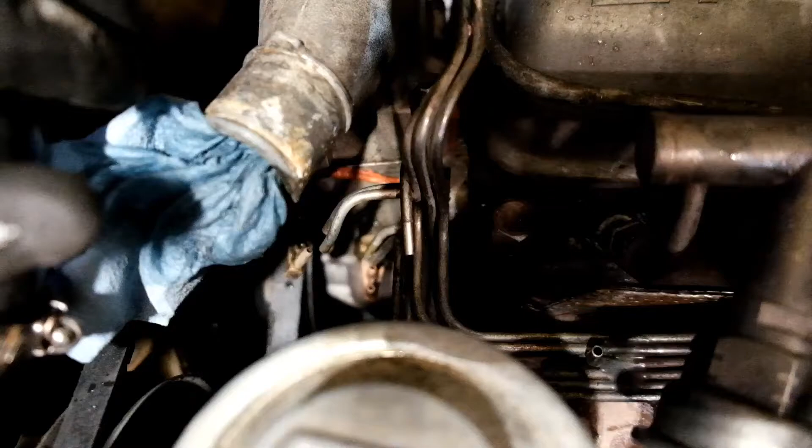Alright guys, so I want to show you guys what I've done so far.

Basically, I just installed that vacuum line bracket.

I did this a little bit backwards. So I put this air injector rail in first last night, but then I realized my initial plan was not to use this vacuum line rail, because I think it was pretty much all hooked up anyways.

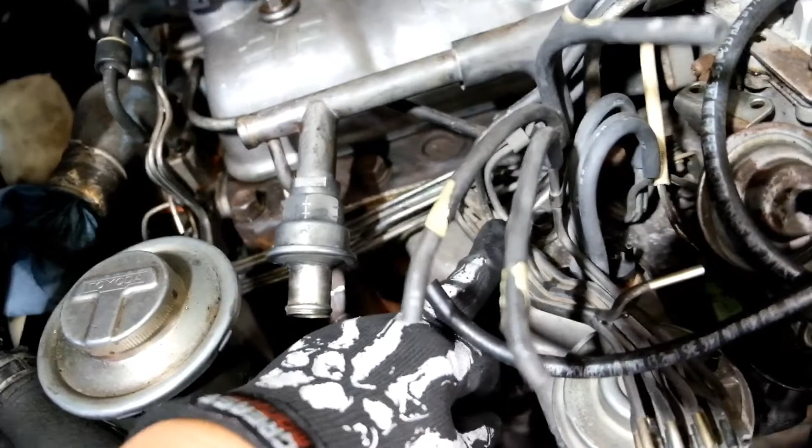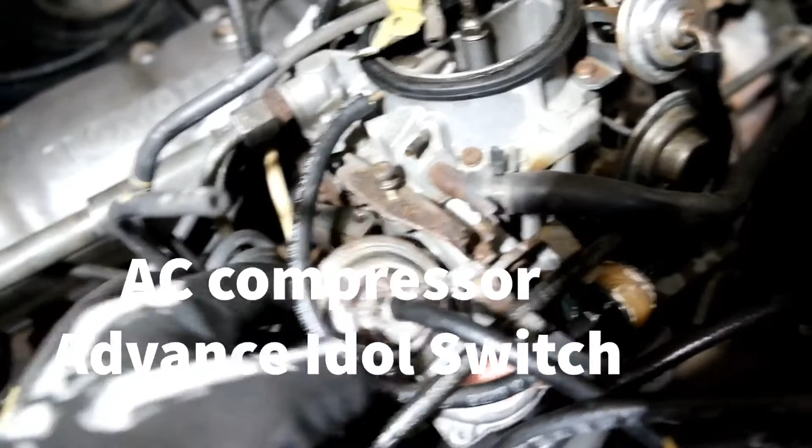But then I changed my mind today. So getting it fed through here was not an issue. I just had to remove this little thing, I don't know what it is, off the carburetor. Once I moved this out of the way, I was able to feed this vacuum line rigid line under this pipe right here and fed it through here.

Now the bolt you'll need to take off is off the water pump - I'm sorry, not the water pump, the thermostat. That's where this mounts to right here. You'll lose a little bit of fluid, so not a big deal. And then there's one more screw right here where my finger is. Let me get a little bit of light here. So there's the other screw.

So right now everything looks really good. One nice thing about this particular rail is that it already has all the vacuum lines, for the most part, already there. So now it just becomes plug and play kind of an idea.

So I will go ahead and turn the camera off and do a little more work here, and then I'll come back and update you on the progress.

Okay guys, so I just want to give you an update. So I've got this whole section from the driver's side over all wired up with the vacuum hose, and everything looks really good. It was actually a lot easier than I expected going into this specific process.

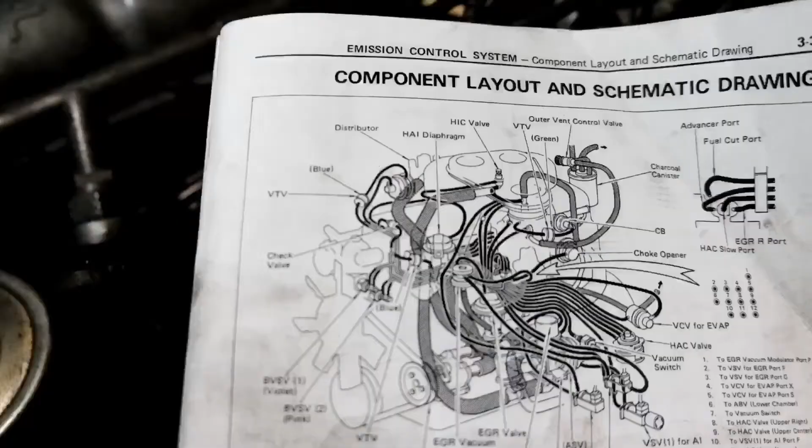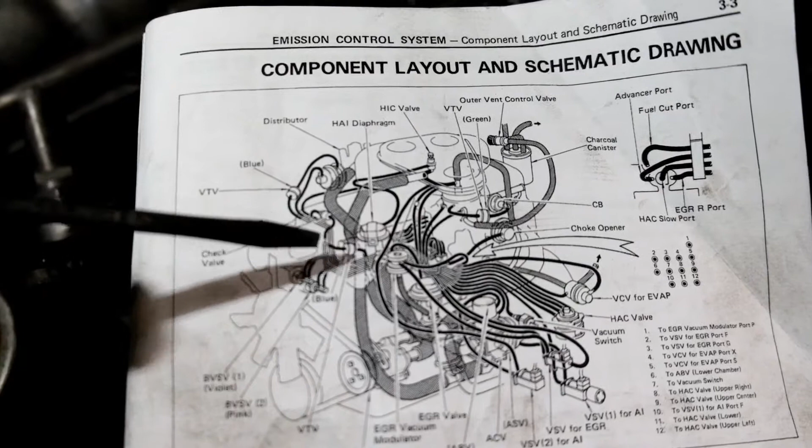Okay, so let me just share with you guys how detailed this book is for you to do this project. For example, I was working on this - let me grab a screwdriver. So see this little filter right here? It's hard to see on the camera, but you gotta trust me. So what this filter is, it says here...

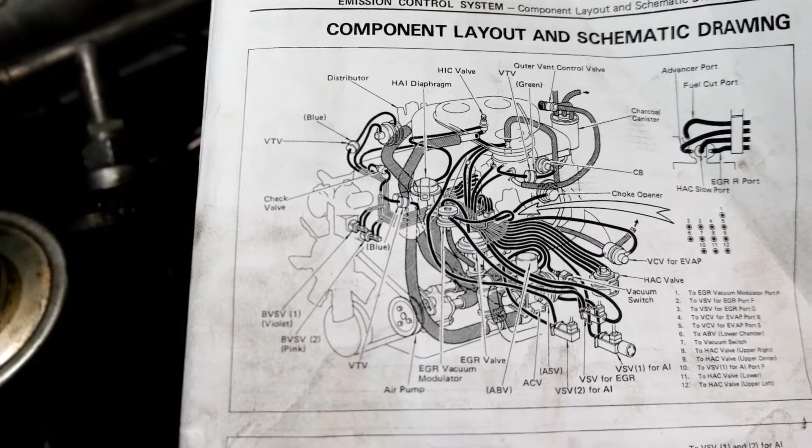VTV with the arrow, and then blue. The word blue is right here with the arrow. So I didn't really know what that meant, and I was looking at this particular tube coming into each other. Let me just show you what that means.

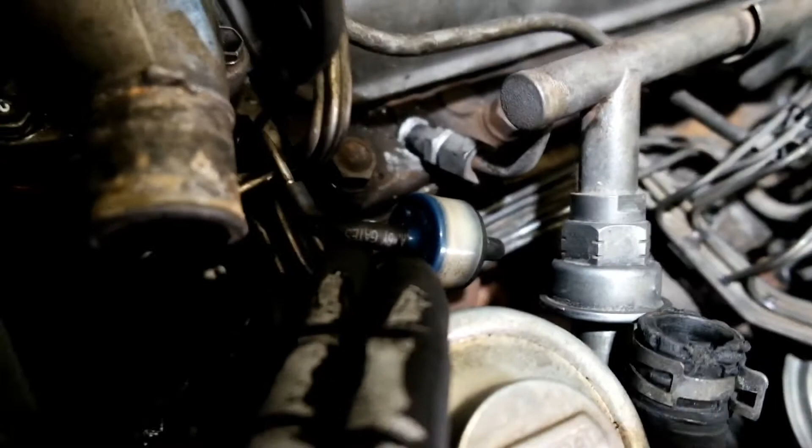So if we go over here, this is the filter right here, and one side is blue, okay, and the other side is black. So basically this tells you exactly which way to point that filter.

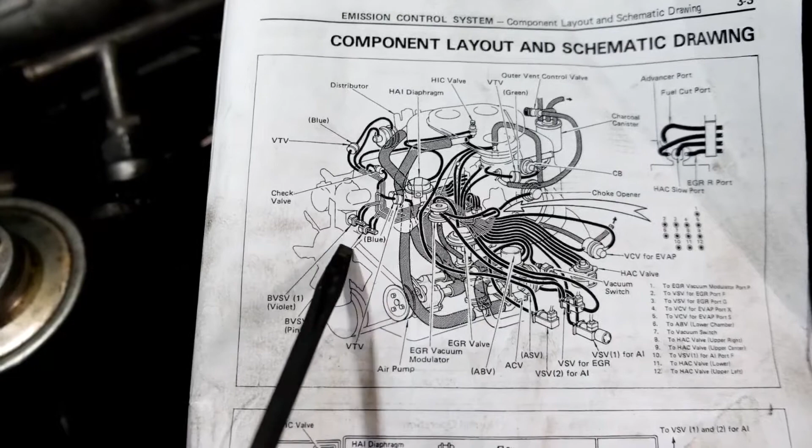I'm not even sure if this is a filter, but VTV, I'm not even sure what that really means. But honestly, at this point I don't really care, because look at this, it's like almost idiot proof. Blue side on the left and the other side is a different color.

So how easy is that? But anyways, just want to give you a little example of the detail of this manual.

Okay, so let's just take another look at my vacuum line diagram here. It looks pretty sweet, right? So everything is accounted for. It was very simple to follow with the book.

These two actually go on the air filter, so that's why this is hanging out. And I can't remember what this is for exactly, but I got a picture of it, so I'll figure that out.

But other than that, I mean, look at this. It turned out so good. So good. Really, really, really excited.

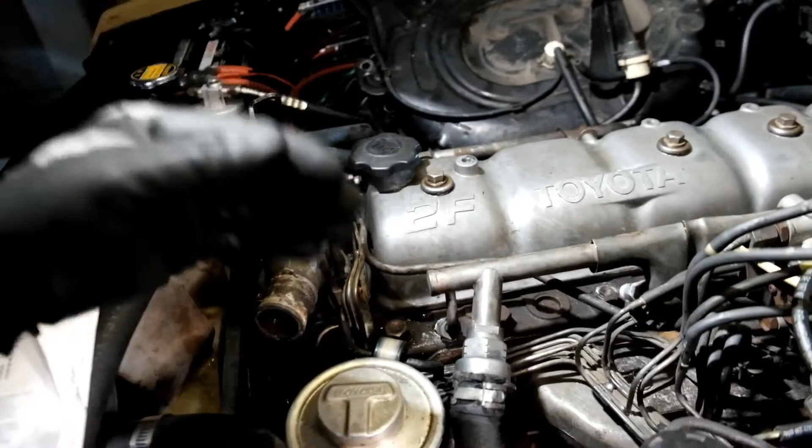Okay, so now what I'm going to do is I'm going to start working on the other half of the engine. But to do this, I think I'm going to have to take my air filter off of the carburetor so that I can access all of that.

So again, this made a lot of sense to maybe break it in half, do this half first, and then once you get this half done, then go to the other half. Alright, so anyways, just want to keep you guys updated and show you what I've done so far, and I'll keep you posted on the other side, okay?

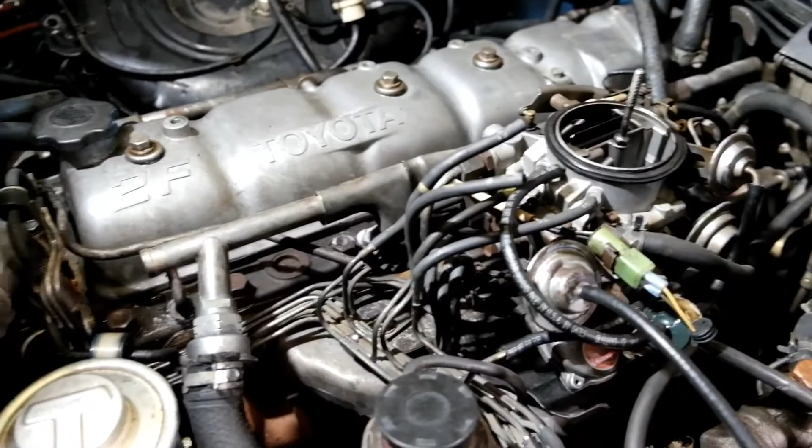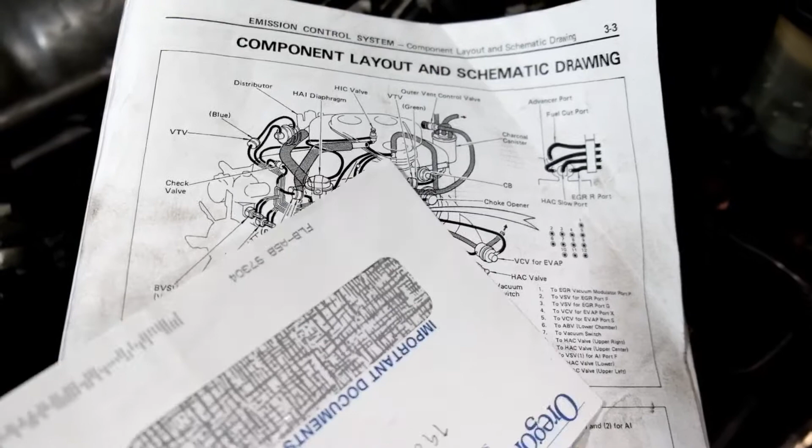Alright guys, sorry, let me give you one more update just to put into perspective so you get an idea of the progress that you're making. So like I said, I've done the driver's side half of the engine. Let me just cover this up so you understand what I've done so far.

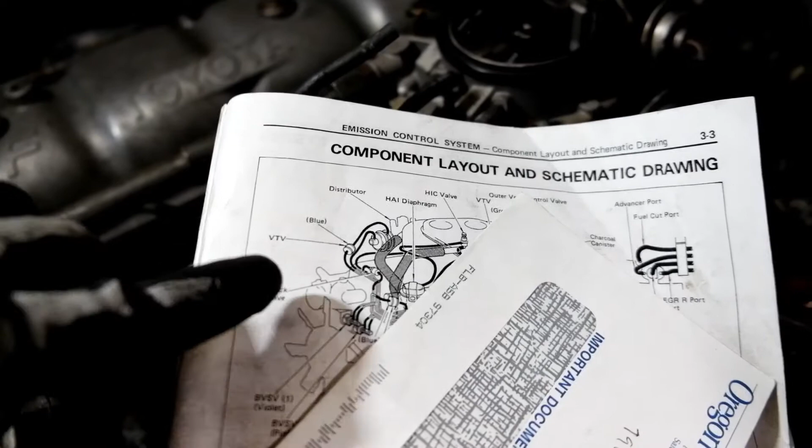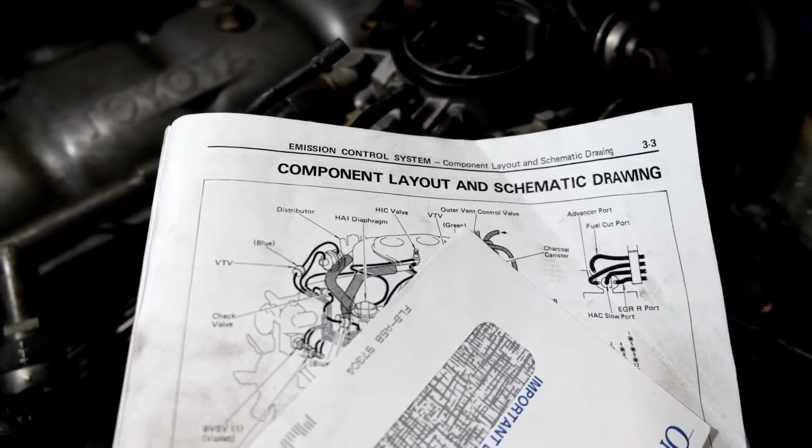So whatever you see left, this is really all that's left to do. Wherever it's shaded and bold black, those are the vacuum hoses that I need to run right now. After that, I should be golden. Just want to give you an update that we're making significant progress and definitely seeing some light at the end of the tunnel, knock on wood.

Okay, so I'll keep you guys posted on the rest of the process in just a little bit.

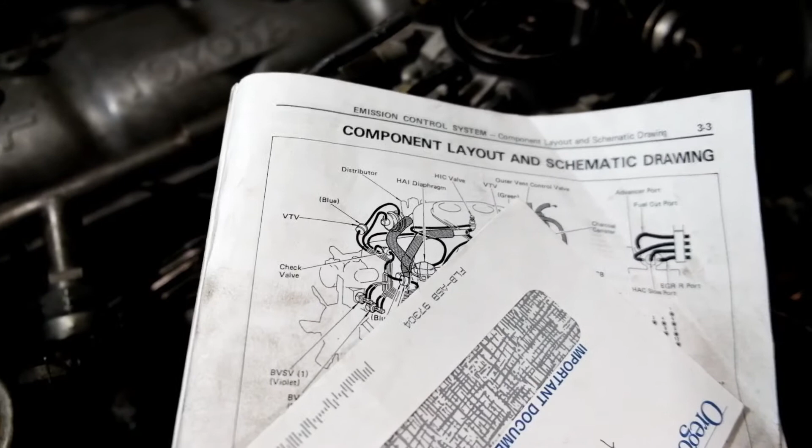Alright guys, so we just finished up the last part of the smog on my FJ60. I went down to Valley Hybrids and got some parts from George. These are all used parts I threw in here, so hopefully it won't cause any issues. I think we are good to go down to the smog shop and see how it goes. Cross your fingers. Let's go drive down and I'll keep you guys posted.

So let me back up here. One thing I wanted to share with you guys, what I've done here to help maybe pass smog today is I threw in some brand new plug wires, these are Toyota wires. I've also put in new spark plugs by Denso, which is also a Japanese Toyota product. Brand new air filter, OEM.

Did a flush on my radiator, so all new, well some new hoses. Double checked all my vacuum lines, so hopefully that's good to go. Let's see, what else did I do here? I think that's about it. So let's see how it goes, hopefully that's enough to pass smog. Let's see what happens.

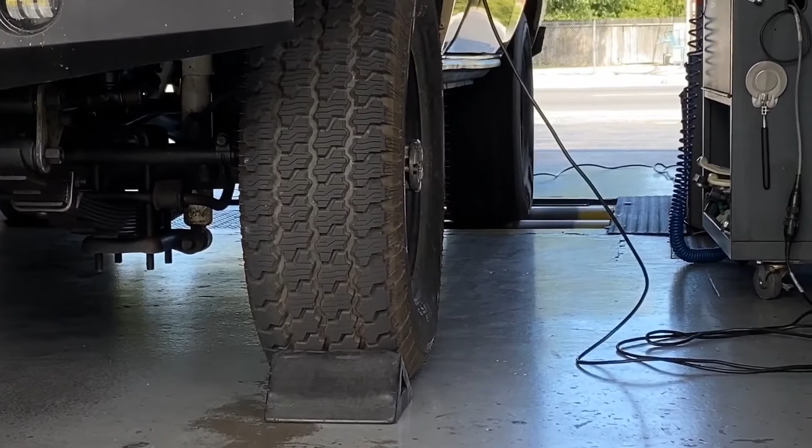Alright guys, so I failed smog miserably. It's the same numbers that I went with earlier, the first time. So I'm gonna go get my carburetor rebuilt, because I know another buddy who has the same truck. He had the same numbers, he was a gross polluter, but then he had his carburetor rebuilt by some guy, and his numbers came back fantastic. So I'm gonna go spend the $500 and get my carburetor rebuilt, and hopefully that will resolve this issue. I'll keep you guys up to date, so thanks for being patient.

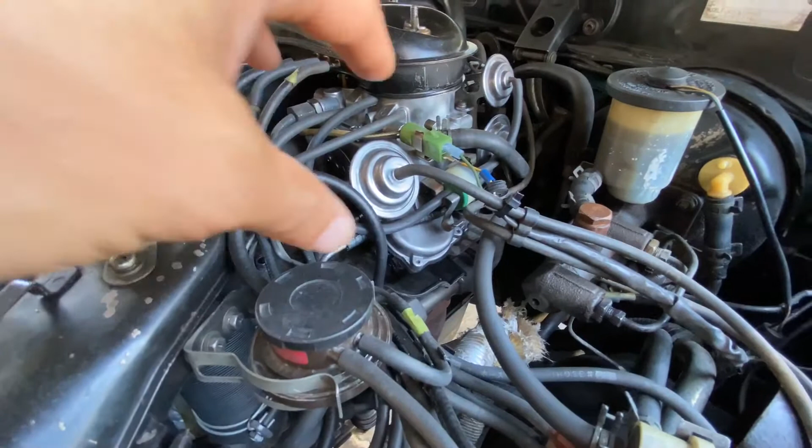Hey guys, so I'm here at the AC place getting my system charged up, and I want to give you an update on my carburetor and my emission system. So I took it in for a second time after all was installed, and it failed smog miserably. In fact, the numbers didn't change from the first time to the second time. So I brought my carburetor down to Peter here at United Carburetor in Sacramento, and he rebuilt the entire carburetor system, jets, gaskets, seals, and all that. And after that, it passed smog with flying colors. In fact, it blew 0.01 on the emission. So that's, to me, as good as a brand new car.

I just want to share with you guys this whole vacuum line configuring and all the process that I've gone through to get this thing smogged. And thanks to the help of United Carburetor and the Cruiser Brothers in Stockton. Shout out to those guys for having the parts and providing me some advice. So that was really helpful.